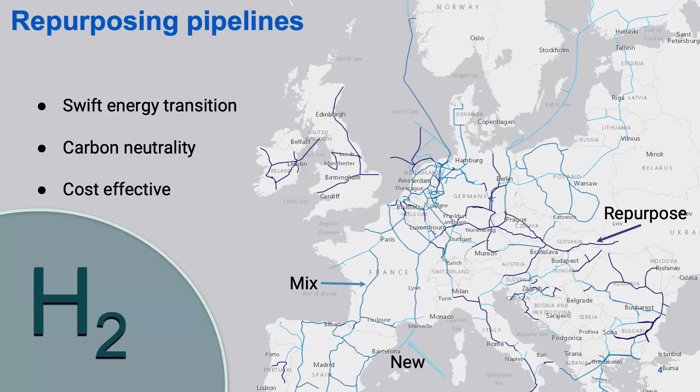In addition, factors such as the age of the pipelines, the in-service degradation due to the natural gas transport, and the manufacturing technology all have significant impact on how hydrogen interacts with these steel materials. Hence, in this context, the focus area of the project is to compare two versions of the L485 pipeline steels and welds in two conditions, that is stock and excavated. For simplicity, for the further part of this presentation, I will abbreviate the stock as A and excavated as B.

The difference between them is that the stock material was never used for the natural gas service, whereas the excavated one was used for 30 to 40 years for the natural gas transport. This indicates that the excavated material has already stood the test of time, including the consequences of the cathodic over protection, that also forms an external hydrogen source. So the question exists, can this still be repurposed for hydrogen service? Let's find out.

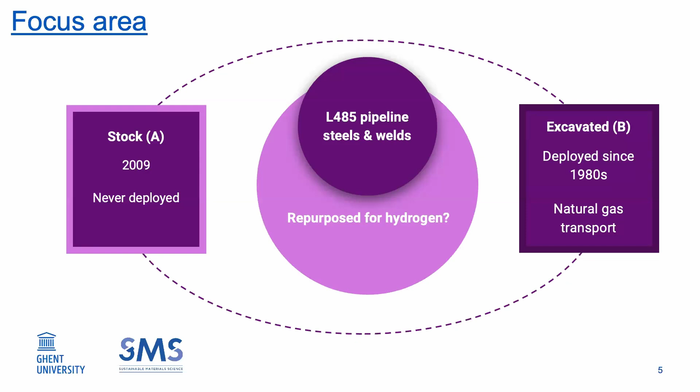The micrographs here are taken from the pipeline middle region along the rolling direction. Both these materials have a highly banded microstructure throughout the thickness of the pipeline, consisting of ferrite and pearlite. In the middle thickness, we also see the presence of segregation bands, with lots of inclusions present there due to the segregation of elements. The difference between the BMA and BMB is based on the ferrite grain size and the pearlite fraction, both of them being higher for the stock material as compared to the excavated one.

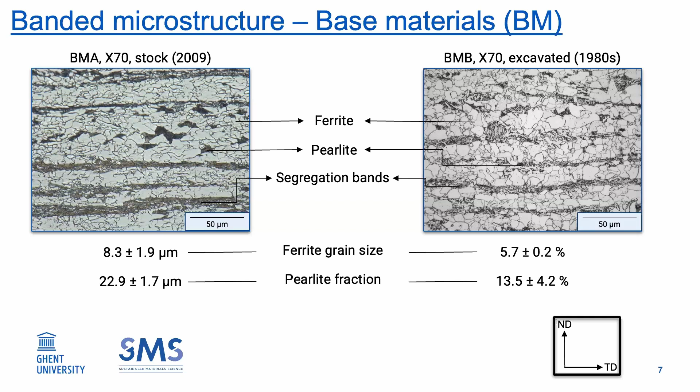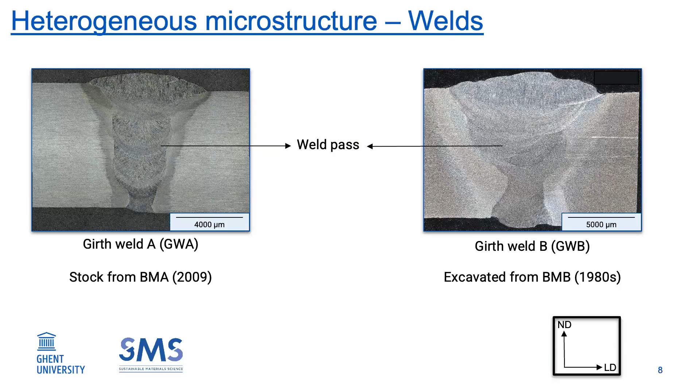The welds are the same material as my colleague Laura just explained. So the material microstructure is very heterogeneous due to multiple weld passes. This is because the microstructure in the vicinity goes through several thermal cycles, and this leads to its heterogeneous microstructure.

Prior to all the mechanical tests, it was necessary to know the condition that exactly saturates our base materials before the testing. So we extracted 6 millimeter cubes from the pipeline middle region and then electrochemically charged them at the given current density for different charging durations, and then hot extracted them at 900 degrees Celsius to know how much hydrogen we are actually putting into these samples. And we see that for all the charging durations, the excavated material shows a significantly higher hydrogen uptake at all the conditions.

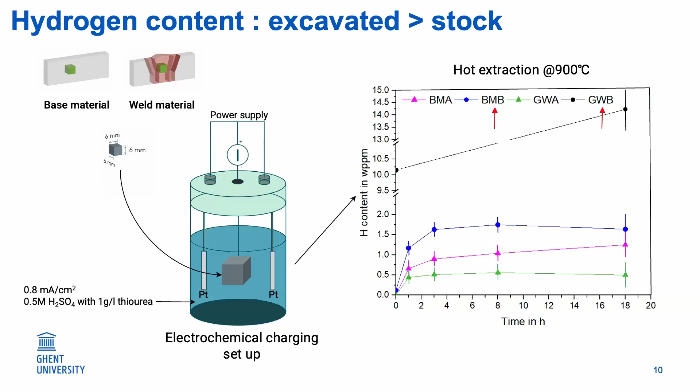The round bars here are also extracted from the pipeline middle region, having different notch geometries, simulating different stress conditions. Then, based on the conditions that we acquired from the hot extraction exercises, we applied the same conditions and charged our samples electrochemically until saturation, and then subjected these round bars to tensile test at a constant strain rate.

From this kind of experiment, we acquire two kinds of information. One is more qualitative, showing the visual impact of hydrogen on these pipeline steels, and then more quantitative information that is given by the force displacement curves and the hydrogen embrittlement indices. In this presentation, I will only focus on the R6 geometry due to the time limit.

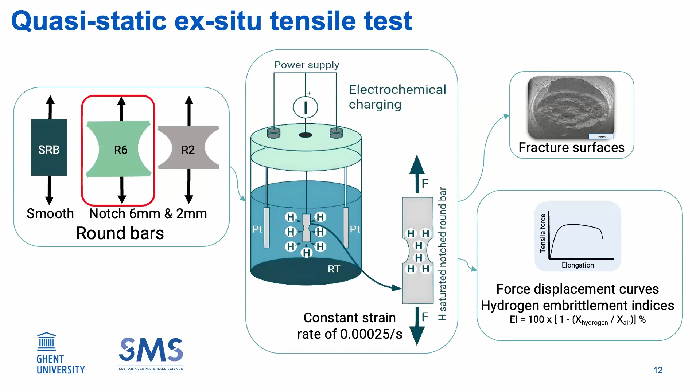As a side note here, we also did the Vickers hardness test at 10 kgf force to know how the hardness is varying throughout the thickness of this pipeline material. And we saw that BMA has a higher hardness than that of BMB. This implies that the resistance to plastic deformation of BMA is more than that of BMB. This is also confirmed by the tensile test experiments that were done in the reference condition for the smallest stress triaxiality. And this is shown by the lower elongation of BMA as compared to that of BMB.

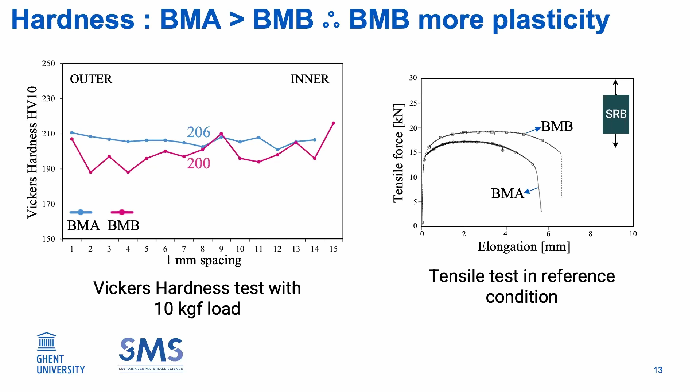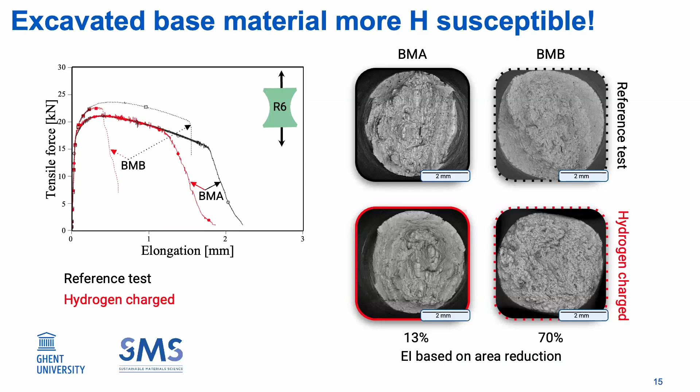Since these specimens were electrochemically charged until saturation before the tensile test, similar hydrogen is already present at the center of these samples as compared to the edge. This is because of the fast diffusion of hydrogen through these materials. As expected, when we zoomed into the central region, because that was the most interesting part, we saw that for the reference condition, there was an extensive microvoid coalescence. And even BMB showed traces of the segregation bands. For the hydrogen-charged sample, a more characteristic quasi-cleavage kind of fracture was seen.

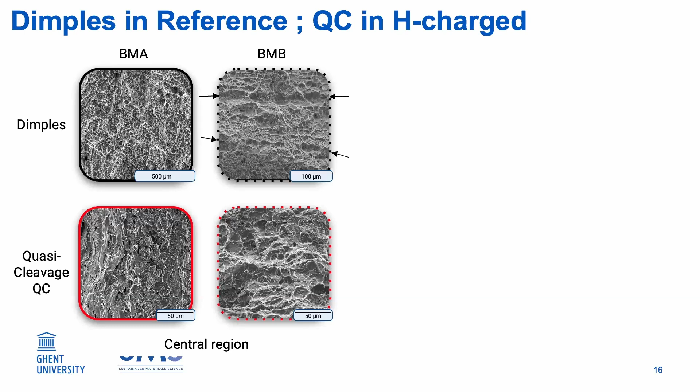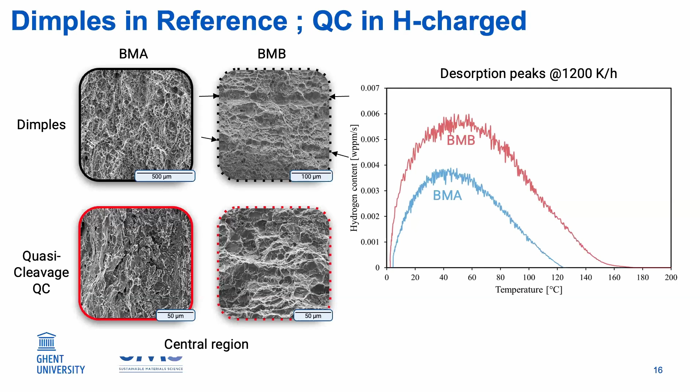Further look into the desorption data shows that a higher desorption peak is present for BMB as compared to BMA, and this accounts for its high hydrogen uptake. Going deeper into the desorption data, fitting it, and then deconvoluting it to sub-peaks, we see that both of these materials have similar overlapping peaks because of their similar microstructure. Moreover, these peaks are only until 200 degrees Celsius, which is where the reversible traps are present. So we assume that the main players for taking up hydrogen in these materials are grain boundaries and dislocations.

If you remember, BMB has a lower ferrite grain size, which indicates that the grain boundary density in BMB is higher than that of BMA. So this can also lead to its high hydrogen uptake. Indeed, more work is needed here to know the activation energies of the traps for hydrogen desorption, to know actually which kind of traps are involved for such a behavior.

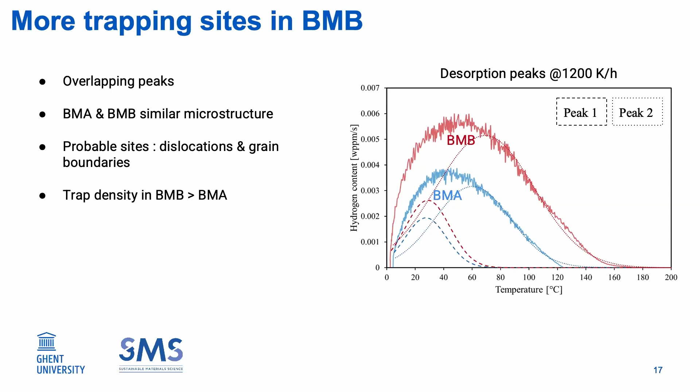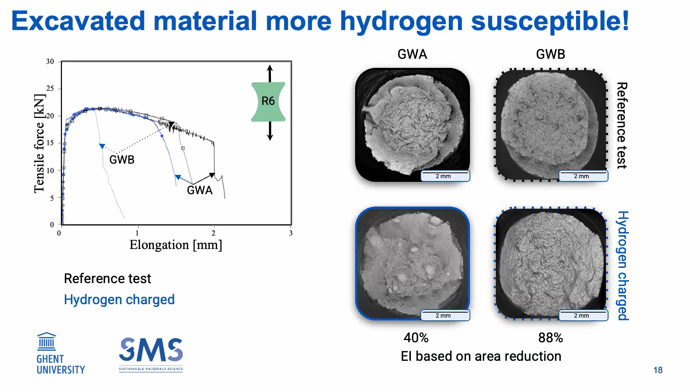Similar behavior is also seen for the welds, in that GWB had a higher degradation than GWA. In the fracture surfaces, apart from the brittle fracture, like quasi-cleavage, we also saw fish eyes in these welds. Quantitatively, GWB showed 88% embrittlement in contrast to 40% for GWA, and this is based on the area reduction. The reference samples showed ductile fracture having both regular and shear dimples along with large inclusions forming part of the ductile fracture. And in the fracture surfaces, along with the quasi-cleavage, we have fish eyes. These images are also taken from the central region.

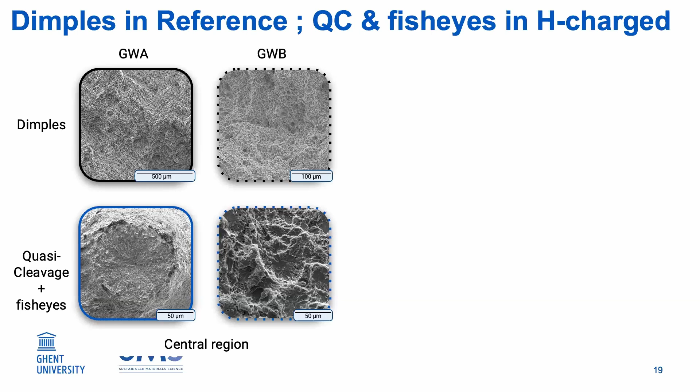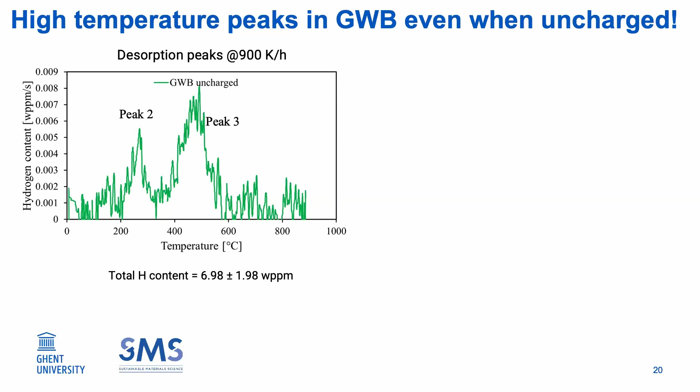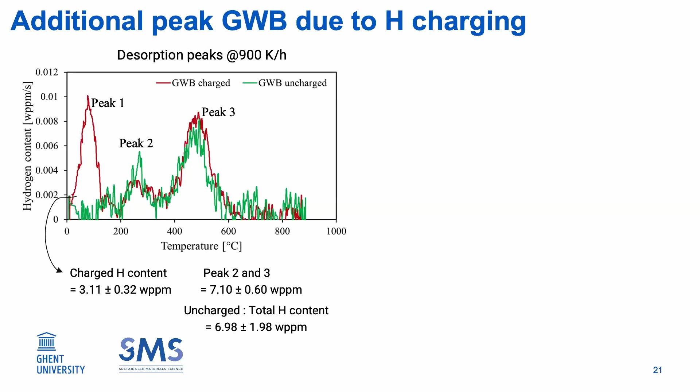Further look into the desorption data, we see that for GWB, multiple peaks are present that account for its higher hydrogen absorption than GWA. Looking closely at this GWB material, we see that even for the uncharged condition, 2 peaks having almost 7 weight ppm of hydrogen are already present. Comparing this with the charged condition, we have an extra peak 1 due to the reversible traps like dislocations and grain boundaries. A deeper look into peak 3 suggests that retained austenite or its interfaces are contributing to this high uptake. Another fact is that since both peak 2 and peak 3 are similarly present in the charged and the uncharged condition, maybe these traps are not being charged by us, but are already present from the production.

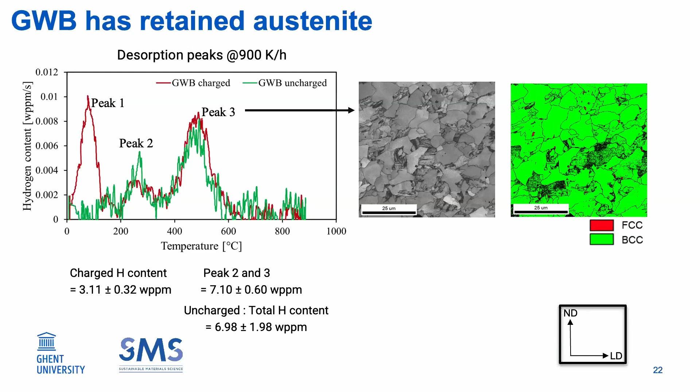Maybe other trap sites like the strained cementite-ferrite interface shown by peak 2, and peak 3 of the retained austenite interfaces, are all contributing to its high hydrogen uptake. So the key takeaways from this study are that both pipeline steel versions have a very heterogeneous microstructure. The excavated materials are more prone to hydrogen embrittlement for their high hydrogen uptake and for the brittle fracture that they have. Then BMB has a higher trapping density than BMA, and they have similar trap types shown by the desorption peaks. And the presence of retained austenite can contribute to the high hydrogen uptake by GWB.